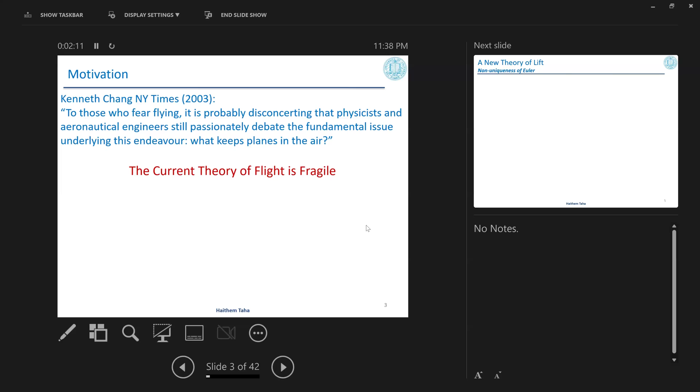So here is the problem that we're trying to solve. Here is a two-dimensional airfoil, and we want to compute the lift force. This is the simplest problem in aerodynamics. It can't be simpler than this. It's not a wing, it's not an airplane, it's just a two-dimensional airfoil. And we engineers or applied mathematicians or physicists, we always like to go back to fundamentals, governing equations. If we can't solve Navier-Stokes, let's look at Euler.

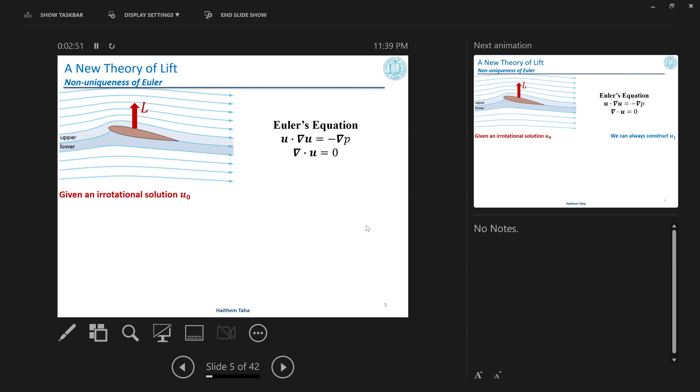Here is Euler, steady. If you give me a legitimate solution of Euler, any solution you like, so it satisfies the PDEs and the boundary condition, a perfectly legitimate solution U0, I can always construct a special flow field U1. It's not a solution of Euler, but, and this is like a small lemma, U0 plus gamma times U1 is a solution of the Euler problem for any value of gamma.

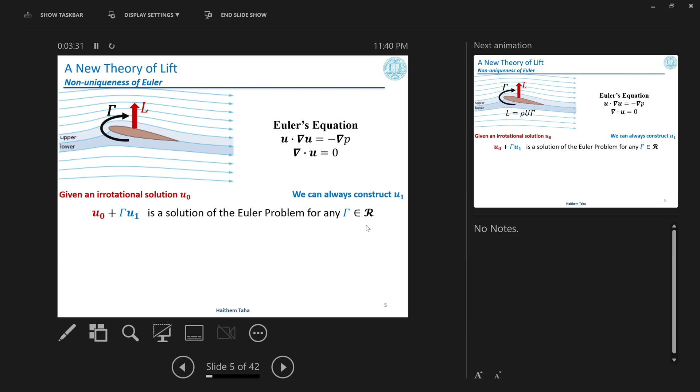So a solution with gamma equals 1 is as legitimate as a solution with gamma equals 1 million. Both satisfy the partial differential equations and boundary conditions. They are perfectly legitimate mathematical solutions. So the question is, what does gamma represent? Maybe it's not important to worry about. Actually, gamma represents the circulation over the airfoil, which solely dictates the lift force. If you give me gamma, I immediately give you back the lift force. Rho is the density and U is the free stream velocity.

So ironically speaking, the Euler equation alone cannot determine one of the most fundamental quantities in flight, which is the lift force, the most important quantity that we care about. The question has always been, what solution does nature select out of these infinitely many possible solutions? It's as if you have x squared equals 4, so x equals plus or minus 2. So let's look at these solutions and pick the most physical one.

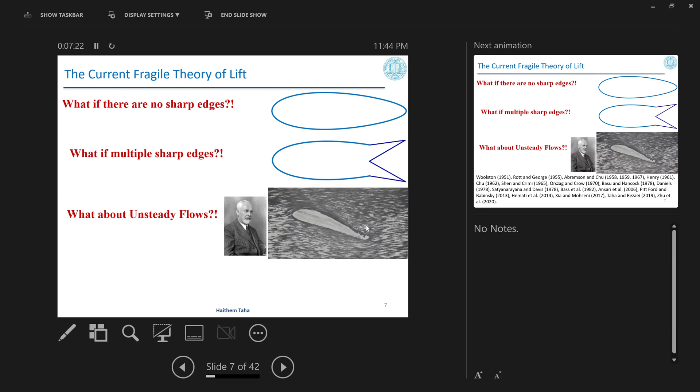So the Kutta condition doesn't seem to be applicable in unsteady flows, and you have tens of papers in the literature criticizing the application of the Kutta condition to unsteady flows. Yet the entire theory of unsteady aerodynamics, from the pioneering work of Wagner, Theodorsen, von Karman, and Sears, all the way to the most recent work in the JFM, they all adopt the Kutta condition in their unsteady models, because simply there are no alternatives. If you don't have the Kutta condition, there is no means to single out one solution out of the family.

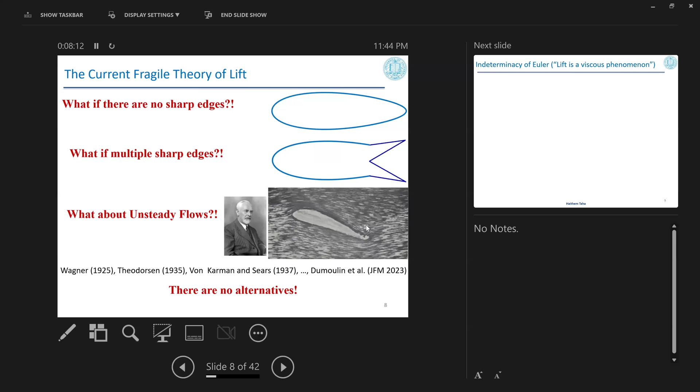So this is why I'm claiming that the current theory that we teach to our undergrads throughout the world is quite fragile. If you change something in the shape of the wing or in the flight condition, the theory collapses, and we don't have a means to compute the lift force, which is very important.

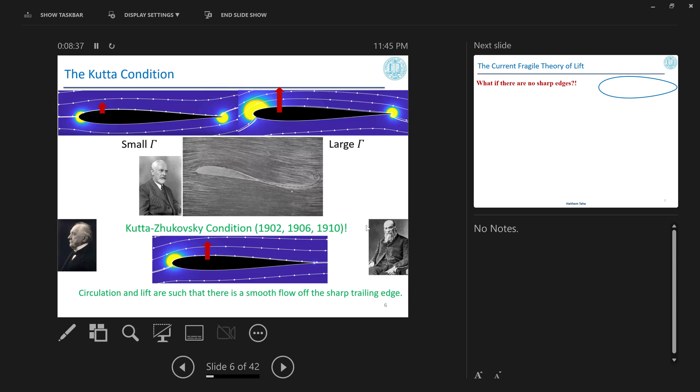What is the Kutta condition again? The Kutta condition is that it removes the singularity. For any other solution, the speed and acceleration go to infinity. This is the only solution where the speed is finite. So if you have a sharp edge, it helps you to remove the singularity. But if you don't have a sharp edge, there is no singularity to begin with. So there is no way to single out the solution.

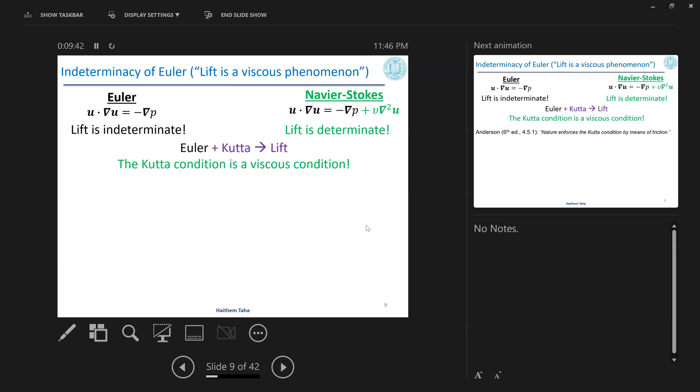And when we feed the Euler equation with a Kutta-like condition, we get lift that is close enough to Navier-Stokes in the nice, attached flow case. So this also seems to suggest that the Kutta condition is a viscous condition, particularly because the Kutta condition was based on observation from reality, and reality is viscous. So this is, I would say, the conventional wisdom in the aeronautical engineering community. Pick your favorite aerodynamics book.

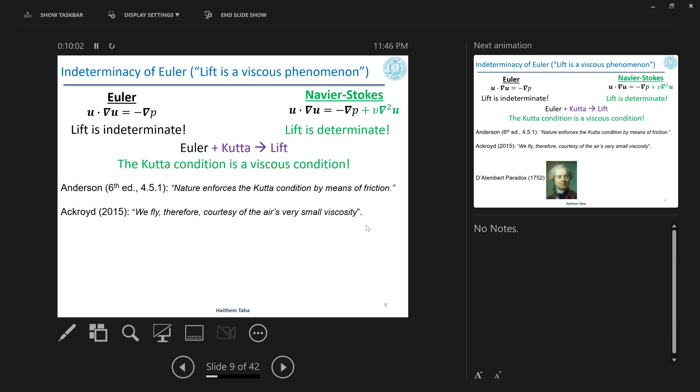Here is Anderson. It says, nature enforces the Kutta condition by means of friction. Here is Professor Ackroyd of Manchester: we fly courtesy of the air's very small viscosity. That's the accepted wisdom in the community. Viscosity gives us lift. And the issue is deeply rooted in D'Alembert's paradox.

Because D'Alembert, around that time, solved the ideal flow equations over some shape like this. And he obtained a completely symmetric solution, fore, aft, up, and down, resulting in a zero net force. And the issue is that D'Alembert's solution, if you try to replicate it over any shape, not necessarily this one, any shape, will give you a zero force.

So deep down in the background of most, not all, most physicists and fluid mechanicians, ideal fluids are forceless. They cannot lift an airplane. They cannot produce forces. So just before leaving this slide, there is one fact that I'd like to stress: around that time, we really did not know that the Euler equation, steady two-dimensional or unsteady two-dimensional, has infinitely many solutions. And D'Alembert's zero force solution is only one solution in the family. So we're not sure whether nature selects D'Alembert's solution all the time or not.

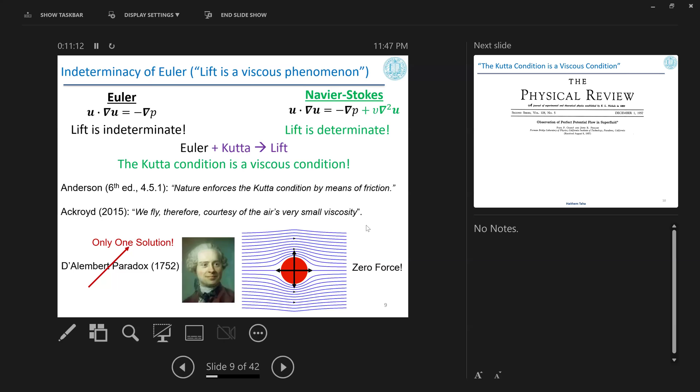The situation was exacerbated even more with this very interesting work at Caltech in the 50s. So they wanted to settle this debate. So they said, okay, if I am claiming that this bag is heavy because there is a box inside that is too heavy, it's making the entire bag heavy. How to test this hypothesis? Remove the box and see if the bag is still heavy or not, right? This is what they did. They said, okay, let's remove viscosity and see what happens.

So let's cool down helium-2 down to a crazy temperature like 2 Kelvin. It becomes a superfluid. Now it has zero friction. So they made a superfluid wind tunnel. This work was done under the guidance of great names like Feynman, Liepmann, and Roshko. So they made a superfluid wind tunnel, a very small wind tunnel, where a superfluid is flowing over some shapes. And they measured the lift. Do we get lift or not? They actually got zero lift.

So this was their conclusion: the classical viscous boundary condition at the trailing edge, i.e. the Kutta condition, doesn't apply. So they are calling the Kutta condition a viscous condition, as usual. And this made sense. Lift, we get it from the Kutta condition. They believe that the Kutta condition is viscous. Here we have an experiment with no viscosity. We found that the Kutta condition doesn't apply and we didn't get lift. It made sense and it was like, that's it. That's the experimental stamp. Lift is due to viscosity.

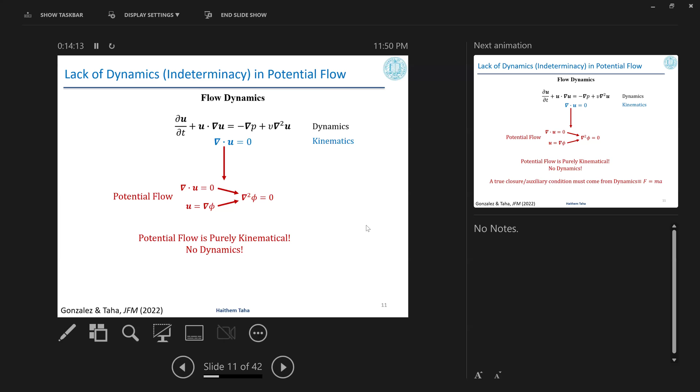So it seems that potential flow is purely kinematic and there is no dynamical consideration, which means that if we want to generalize the Kutta condition, and we're not criticizing the Kutta condition, it's so invaluable in aerodynamics, but its region of applicability is so confined. We want to generalize it. We want to have a general theory. If we want to generalize the Kutta condition, the generalization must come from dynamical consideration, force equals mass times acceleration, because this is what is missing, right?

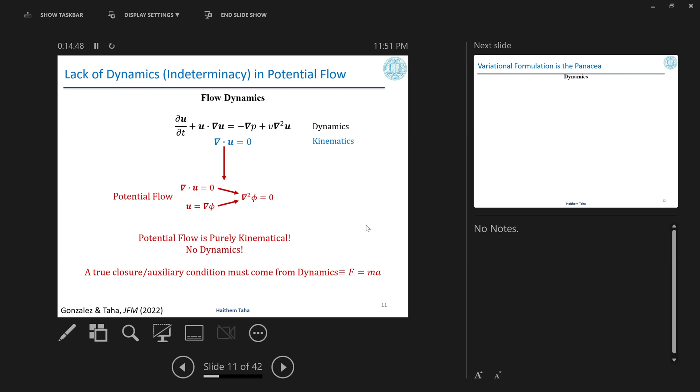But that's very challenging. How to project the dynamics, Navier-Stokes or Euler, doesn't matter, on a one-dimensional manifold to focus on gamma alone. I don't want to go and solve the entire flow field down to the Kolmogorov length scale. I'm happy with my model. All I want is one single parameter, gamma. Can you give me gamma? That's it. So that's a very challenging problem: how to project the entire dynamics on a one-dimensional manifold.

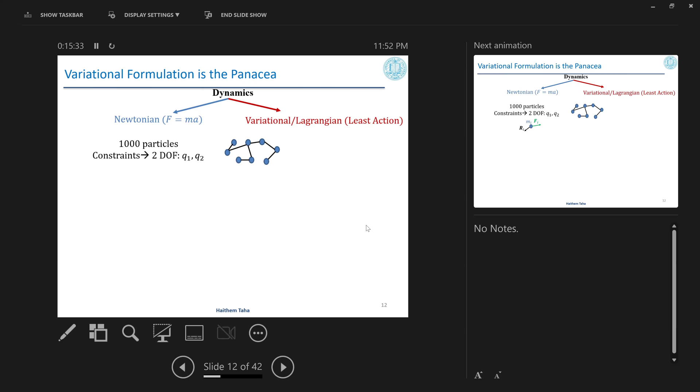How can we solve this using Newtonian mechanics? Well, the very first step in Newtonian mechanics is to draw a free body diagram. Right? So I have to isolate each particle and write down the equation of motion for each particle. So these are 3,000 equations of motion. And I need to be patient enough to mathematically manipulate them to arrive at two relevant equations at the end, because at the end of the day, I have only 2 degrees of freedom. That's the only way to do it using Newtonian mechanics. There is no other way. I have to write down 3,000 equations of motion and solve them, even though I have 2 degrees of freedom.

I mean, this is actually for a continuum of infinite fluid particles, you have a partial differential equation. Right? So you have Euler or Navier-Stokes. On the other hand, when we look at the Lagrangian variation, there are many ways to describe it. I'll describe it in my own way, which is sometimes controversial, but I'll do it anyway. So the main premise is that nature minimizes a certain fundamental quantity.

So any motion, you have a planet that is orbiting the sun, or a tree leaf falling to the ground, or a heart that is beating, or a viola string that is vibrating. They all move such that a certain fundamental quantity is minimized. So if you manage to write down your fundamental quantity in terms of your degrees of freedom, then the rest is easy. It's high school calculus. Differentiate and equate to 0. You get 2 equations directly in the 2 unknowns without the need to solve 3,000 equations.

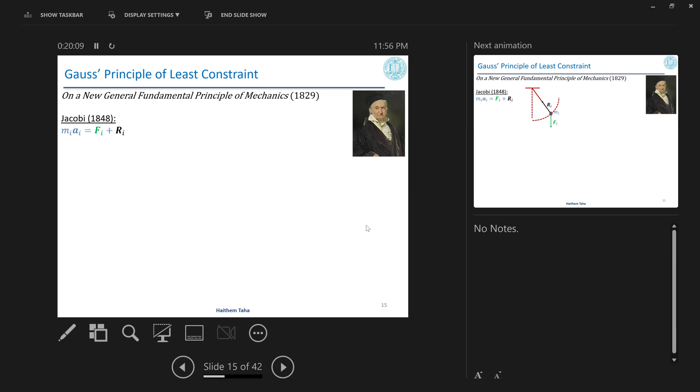In the absence of constraints, so there is no R, these two quantities are exactly the same. You apply a force, you get a motion in the same direction. In the presence of constraints, however, if you have non-zero R, the actual motion will deviate from the applied motion. Why? Because of the constraint. Then it means that it will deviate from the applied motion only by the amount that satisfies the constraint and not anymore. So this is why this quantity must be minimum.

And in fact, you can rewrite this quantity from the equation of motion as R over M. And it's as if we're minimizing the summation of all constraint forces. So this is why, hence the name least constraint. Okay. And when you write it as R like this, it looks familiar. It looks like a residual. R is really a residual between the applied motion and the actual motion. So it's as if we're minimizing the residual squared. So it rings the bell of least squares.

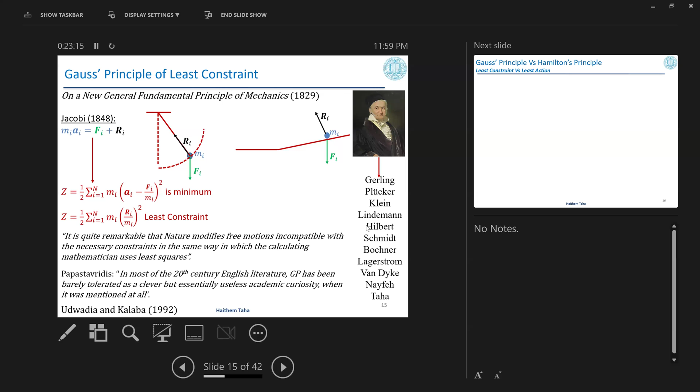But before leaving the slide, I'm going to give a fun fact. I was very happy when I learned that there are only 10 names between Gauss and myself, thanks to Haithem. And there are some nice names here like Klein and Hilbert. So anyway,

let's go back to your point. Let's make a comparison because this is very well known. Hamilton's principle of least action versus Gauss' principle of least constraint. And this actually makes selling things along this line of research difficult, because whenever I use a variational principle, people immediately jump to here.

First of all, if you look at the dates, they were developed around the same time. Yet this is very famous. It's discussed in every single textbook in analytical mechanics and classical physics. This one is rarely encountered, which is quite interesting. The applied forces in Hamilton's principle of least action must be, I don't want to get into details, let's say coming from a potential energy, conservative kind. Here, no, they can be arbitrary, which is a big plus. That's really a big plus.

Hamilton's principle is stationary. It's not necessarily minimum. All what we know is that the first derivative is zero, the first variation. Gauss' principle is a true minimum. That's also another big plus.

In Hamilton's principle, the quantity that we minimize, or whatever, extremize, is an integral over time, the integral of the Lagrangian, right? Integral of kinetic energy or whatever over time, the action. So your variable that you're differentiating with respect to is the whole trajectory. So this needs a special calculus, the calculus of variations. And when you use calculus of variations, you get Euler-Lagrange.

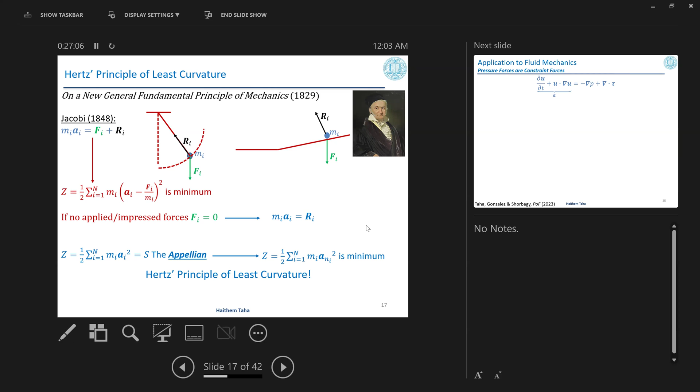Okay. So a particle moves according to least curvature. A collection of particles moves such that the total curvature in the system is minimized. And that's a special case of Gauss. I think that's enough. Let's go and apply it to fluid mechanics. Incompressible flow, of course, here. So this is Navier-Stokes, mass times acceleration equals forces, and I'm taking unit density, unit mass, because it's incompressible.

In order to apply Gauss or any analytical mechanics, any variational principle, I need to classify forces into applied and constraint forces. Viscous forces are applied forces. They are not associated with a given constraint such that if the constraint is removed, they will no longer be there. This is not the case. They are part of the fluid identity, so they are applied forces.

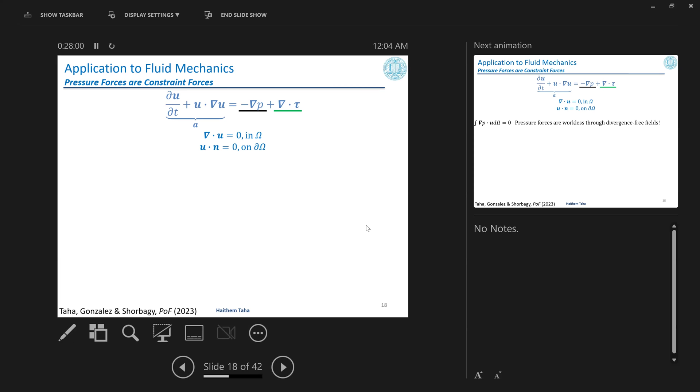Interestingly, as many people know, particularly the math community, this is very well known, perhaps less well known in the classical fluids community: pressure force for incompressible fluids is a constraint force. Actually, its sole role is to enforce the continuity constraint. And it's easy to show in a couple of lines that if you have a velocity field that satisfies continuity and the no-penetration boundary condition, then the pressure force doesn't do any work on it. It's workless, which comes from the Helmholtz-Hodge decomposition.

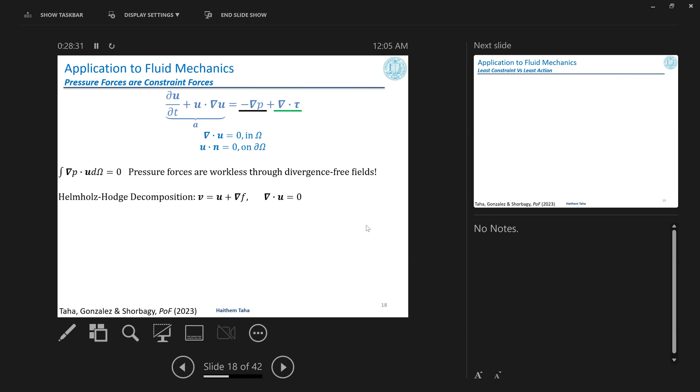If you have a velocity field, you can decompose it into two components, one that is divergence free, and the other one is the gradient of a scalar function. And these two components are orthogonal. So the velocity field U is not only orthogonal to Nabla pressure, it's orthogonal to Nabla of any scalar function. Let's sketch it. So this is R3, our world, and here is a blob of fluid.

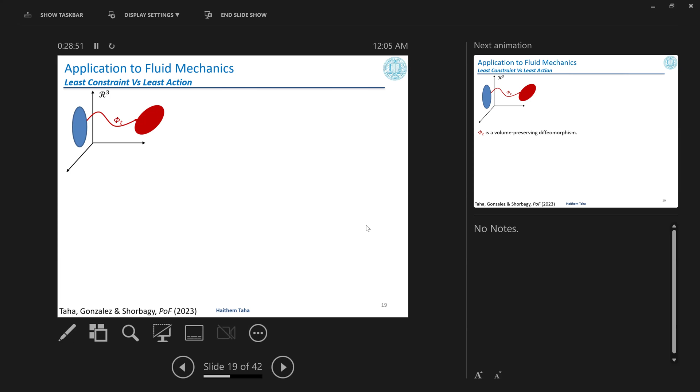It goes after some time into another configuration, and phi t is the flow map that maps the initial configuration to the final configuration at some time. Phi is a smooth map with a smooth inverse. The mathematicians have a fancy name for it, a diffeomorphism, right? But for an incompressible flow, it's volume preserving, so it's a volume preserving diffeomorphism. Okay. Now let's go to this fictitious space, an infinite dimensional space, a very large space, the space of all these diffeomorphisms.

So any point in that space is one of these maps. Okay. So any point here is a snapshot of a flow field. Why? Because this map maps all the initial conditions to this snapshot. Okay. Not all points here are relevant for an incompressible fluid, because only those lying on the volume-preserving surface or manifold are relevant. A curve here is just a flow field, right? An evolution of a flow field.

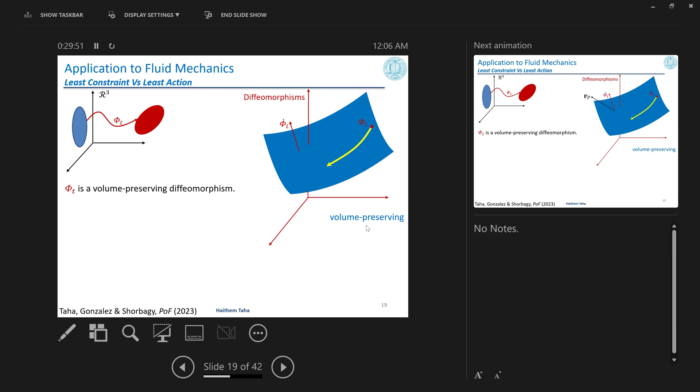And the tangent vector to that surface is just a velocity field that satisfies continuity. It's a divergence-free velocity field. By Helmholtz-Hodge decomposition, the pressure force is normal to that surface, right? And now look at this picture and use basic knowledge in mechanics. Let's consider ideal fluid. For ideal fluid, you don't have viscosity. The only acting force is pressure force, right?

But the force is normal to the surface. So on the surface, the fluid is free. No force is on the surface. And like any free mechanical system, the least action says it has to move along straight lines, along geodesics, right? This is exactly Arnold's seminal result, but in a sketchy way, that the motion of ideal fluids are geodesics in the space of volume-preserving diffeomorphisms.

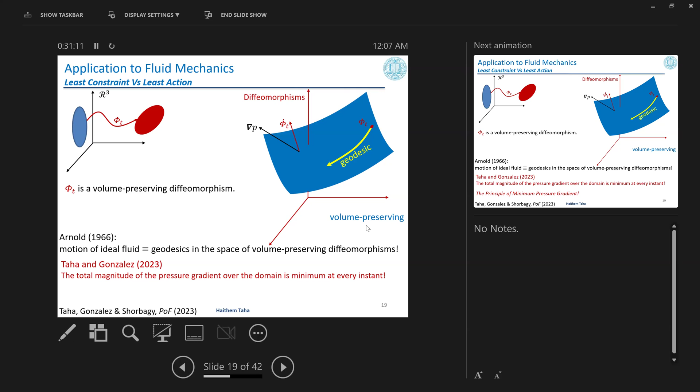Okay, so that's natural. Now let's take one step ahead. Let's now consider real fluids with viscosity. So I have other forces coming from viscosity. And instead of applying least action, let's apply Gauss's least constraint. What does Gauss say? Gauss says that this force is a constraint force, so the summation of all constraint forces is minimum. That's precisely what we're saying here: that the total magnitude of the pressure gradient over the domain must be minimum at every instant in time. And this is what we call the principle of minimum pressure gradient.

Okay. So I walked you through how we came up to this conclusion, doing nothing but applying Gauss's principle verbatim. But here is a theorem which is not fancy at all. It's applying standard tools in calculus of variations. It says if you give me a solution that minimizes this function, a minus f over m, which is nothing but the pressure gradient, subject to continuity for all time and space, and the no-penetration boundary condition for all time, this can be anything, it doesn't have to be homogeneous, then this solution must satisfy the Navier-Stokes equation. And again, this is really standard tools in calculus of variations.

It's nothing fancy. So it means that the Navier-Stokes equation is the necessary condition for minimizing the pressure gradient, which turns a fluid mechanics problem into a minimization problem. Why? Because if you give me a solution that minimizes this thing, it is guaranteed to naturally satisfy Navier-Stokes. You don't need to worry about Navier-Stokes. In fact, this minimization is a bit more general than Navier-Stokes in the following sense.

If you have extra forces like electromagnetic forces, for example, I must come here in Navier-Stokes and add my force. I must modify the equation. Whereas the PMPG applies verbatim with the exact same statement: the total magnitude of the pressure gradient must be minimum at every instant in time. So we use this to solve classical fluid problems without going to Navier-Stokes, just minimize the pressure gradient.

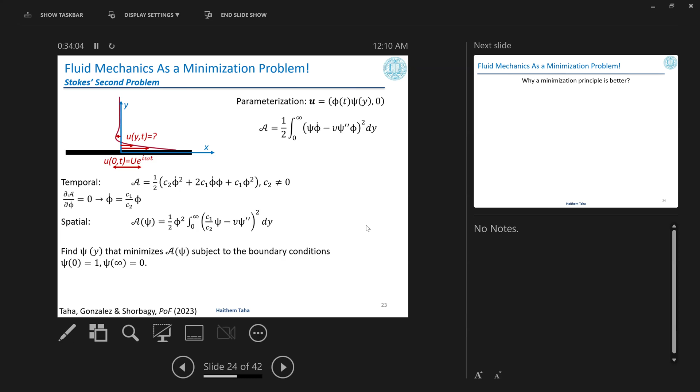So this raises the question: why is a minimization principle better? Okay. There are several cases we can discuss at the end, but this is my own motivation as someone interested in reduced order modeling. As an engineer, I really don't care about all the flow details down to the Kolmogorov length scale.

I really don't care about this. I care about global quantities like lift, drag, separation point, these kind of quantities. So I'm very happy with a reduced order model that doesn't give me all the details, but gives me some of these quantities with good approximation.

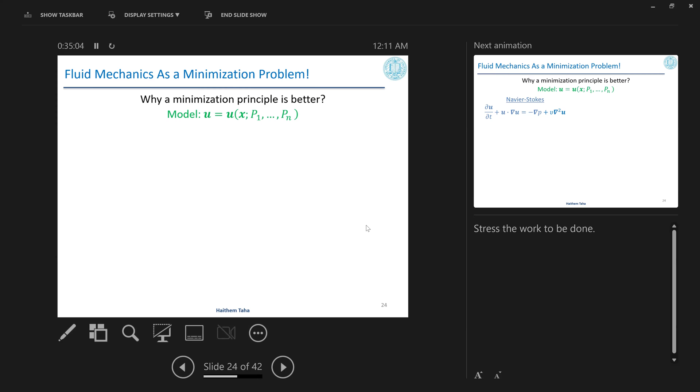So if you start with an approximation for your velocity field with some unknown parameters, so you parameterize your velocity field with parameters quite freely, do whatever you like. So I'm happy with this parameterization as a user. All I need is just the values of these parameters or their time variation, their dynamics. Navier-Stokes as a partial differential equation, we can't focus on the dynamics of few parameters. It's like take it all or leave it all.

It gives you the flow details down to the Kolmogorov length scale if you solve Navier-Stokes, so you're doing DNS. If you want to do averaging, then you're solving another equation. You're solving RANS. It's not Navier-Stokes. It's a different equation, right? So Navier-Stokes unfortunately gives you all the details, which is sometimes good, right? But unfortunately, it doesn't do it for free. It's too demanding to the extent that there is no supercomputer on the entire planet that can solve Navier-Stokes on an actual airplane. It's too demanding.

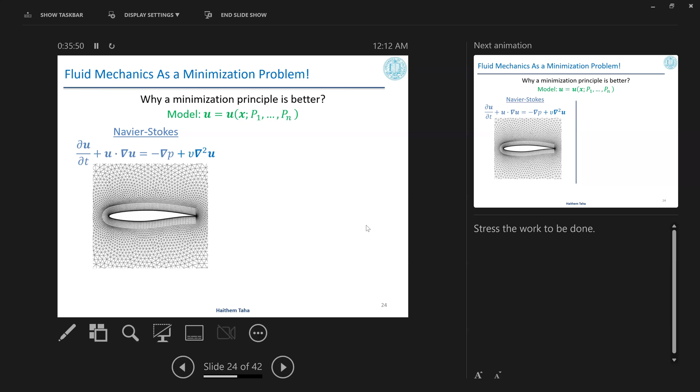Is this a Delaunay mesh or something? I don't know. Someone gave it to me. I'm not an expert in computation. No, I think we used this mesh in one of our RANS simulations.

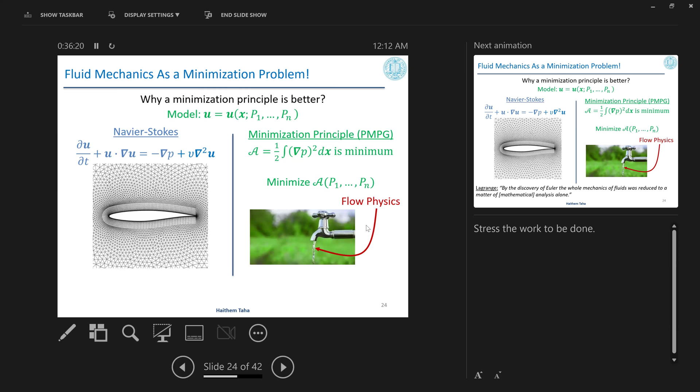And on the other hand, if you have a minimization principle, that's straightforward. You plug this form into your cost function. The result is a cost function that is a function of the parameters. The rest is easy. Just minimize with respect to your parameters. If this parameterization is poor, make it richer, add more parameters. Okay, so it will allow you to control the amount of flow physics that you want to see.

Okay, so actually, it reminds me of what Lagrange said. When Euler developed his equations, the famous Euler equations, Lagrange made this comment. He said, by the discovery of Euler, the whole mechanics of fluids was reduced to a matter of mathematical analysis alone. It's like mechanics-wise, it's done because we have the equation of motion. That's done. But all that remains is to solve it mathematically.

Okay. Now the situation is reversed. Why? Because the mathematical solution may be simple, particularly if these are few. It's just minimized, and you can get it easily with the computational power that we have nowadays. But the real challenge is here, actually, how to propose a form that captures the physics that you want to see. Okay. Anyway, let's go back to our problem that has been waiting for a long time.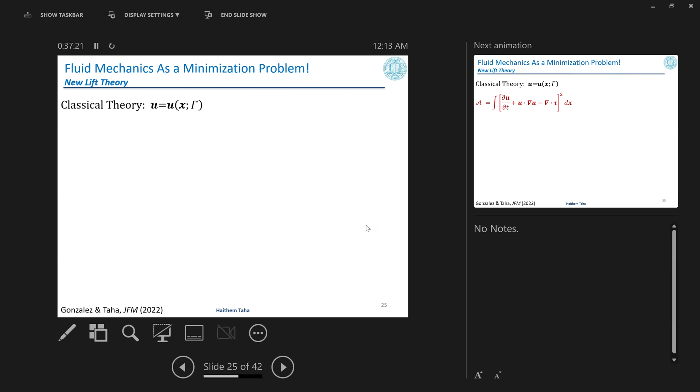This is the classical theory of lift. I know already the velocity field everywhere, and the theory is actually giving me a nice parameterization. There is only one unknown parameter, gamma, right? So I'm going to call my cost function that nature minimizes at every instant in time. And because this is steady, I don't have time variation. And I have a means to account for viscosity, but for a moment, I'm going to cross it out myself. I'm going to assume that my fluid is ideal, no viscosity.

So now my cost is simply curvature, because there are no applied forces. So this is curvature, and I integrate over space. I plug this here, I integrate over space. The result is a fourth order polynomial in gamma. So really high school calculus, nothing fancy. And let's try it for the problem where we already know the solution, a sharp edge airfoil.

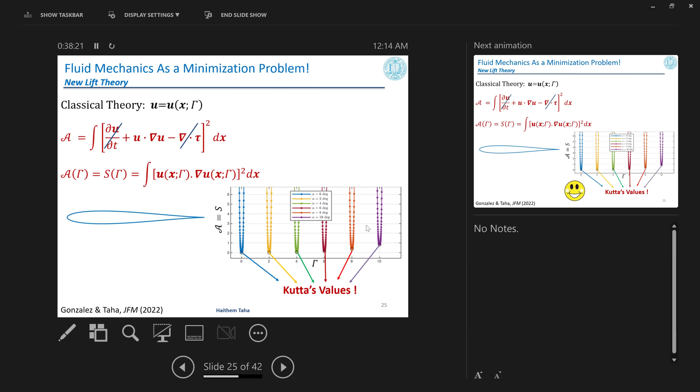Here is the cost function versus gamma at different angles of attack. At each angle of attack, there is a unique gamma that minimizes curvature. And all these minimizers coincide with Kutta's values for this case of a sharp edge foil. So we happily recover the Kutta condition as a special case of this non-viscous theory. Okay. Again, those curves are different alphas. Okay, so alpha is the angle of attack. Yes.

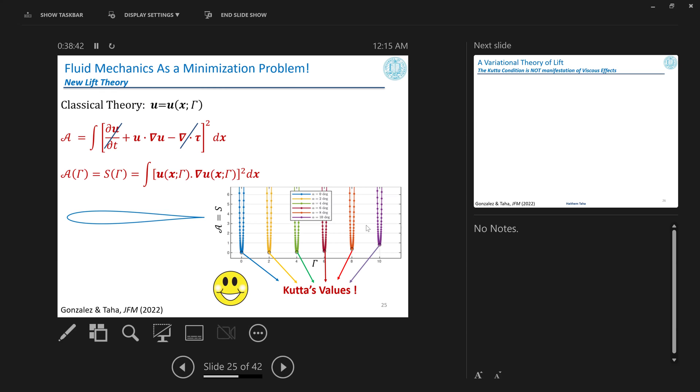So, but this theory now doesn't care whether I have a sharp edge or not. So for the first time, I can consider a family of shapes, smooth shapes, parameterized by this parameter d. D equals 0 is the blue sharp edge airfoil. D equals 1 is the green circular cylinder. In between, I have a family of shapes with smooth trailing edge to which the Kutta condition is not even applicable. So here are the contours of our cost function, curvature, or pressure gradient, in the gamma-D space.

And the yellow curve is the minimizing gamma star, normalized by gamma Kutta. For a particular value of D, give me any value of D, this means a specific shape. For this specific shape, we know that we have infinitely many gammas, but nature chooses only one, the one that minimizes curvature in the language of Hertz. And for D equal 1, this is a green circular cylinder. The minimizing gamma is 0, recovering the well-known fact that a circular cylinder is non-lifting.

But interestingly, this was not only for the circular cylinder. If you tried any symmetric shape, flat plate or an ellipse, purely symmetric, fore, aft, up and down, you will get a minimizing gamma that is 0, which confirms the experimental results of the Caltech folks. They did it also on symmetric shapes. So a symmetric shape in an ideal fluid is non-lifting.

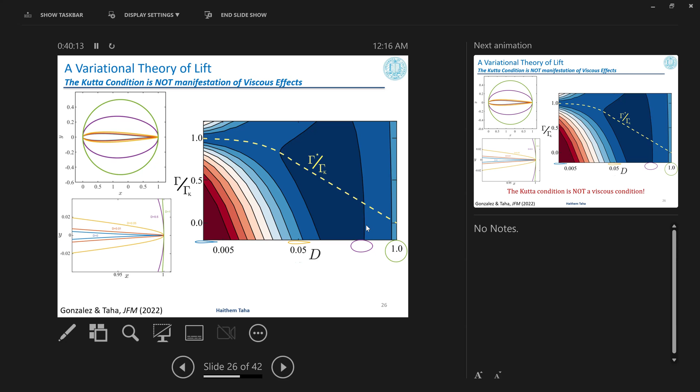But now if you go all the way here to a sharp edge airfoil, we recover the Kutta condition in the limit, which means that the Kutta condition cannot be a viscous condition because now it's a special case of an inviscid theory, so it cannot be viscous on its own. So yeah, that's it. Because as you know, this is taught in all undergrad school, the Kutta condition. So it created some debate in the community.

And then Aerospace America, the magazine, they interviewed Dr. Paul Bevilacqua and myself. Paul is chief engineer of F-35, chief engineer in Lockheed Martin, who built the F-35.

Did you try in the non-ideal case to take non-symmetric shapes with the minimizing gradient of the pressure? Not non-symmetric shape. Yeah. Yes. Right. What I did, I can show it to you. Yeah, I'll show it to you.

So they had a nice article with a fancy title: You think you know lift? Better read this. If you're interested in this problem, you can read more. Also, this is probably my last slide. I'd like to say that this topic has a very rich history. I always move this book, and it got worn, but now I have it in nice shape. This is a 550 pages book written by a sociologist, David Bloor, about the history of the classical theory of lift.

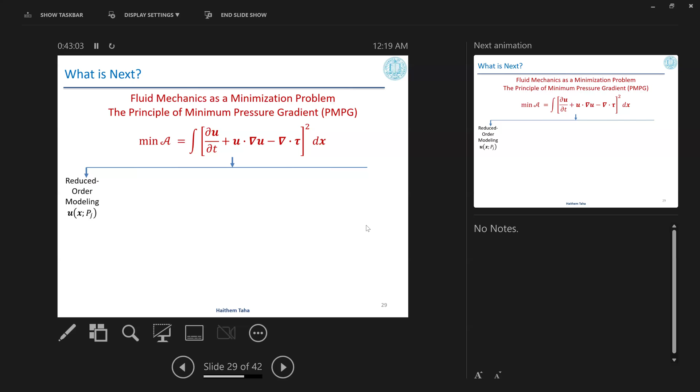But we did something that might be satisfying, and actually goes back to your question, which is ahead in the slide. So we didn't solve Navier-Stokes, but we solved RANS. So we said, okay, here is an airfoil shape at small angle of attack, 2 degrees and 4 degrees. The flow is attached. The flow is nice. We expect RANS will perform well. It actually gives nice results in comparison to reality. So we compare against RANS.

So let's see what this is. This is our cost function normalized versus gamma at different angles of attack. Black are our minimizing values. And the cyan are the RANS computations, which are not Navier-Stokes, but should be close enough, hopefully.

The pink ones are: if you put the hat of a practical engineer and say, look, this doesn't seem to be too far away from sharp. I'll consider it to be sharp and apply the Kutta condition anyway. Because if I don't have this minimizing theory, the only way is to apply the Kutta condition. If you insist on applying the Kutta condition, this is the value of gamma you're going to get.

So as you can see, first of all, at all alphas, we are closer to RANS than Kutta. And even at alpha equal 2 degrees, a very small angle of attack, and this is not too far away from a sharp edge, Kutta is quite off.

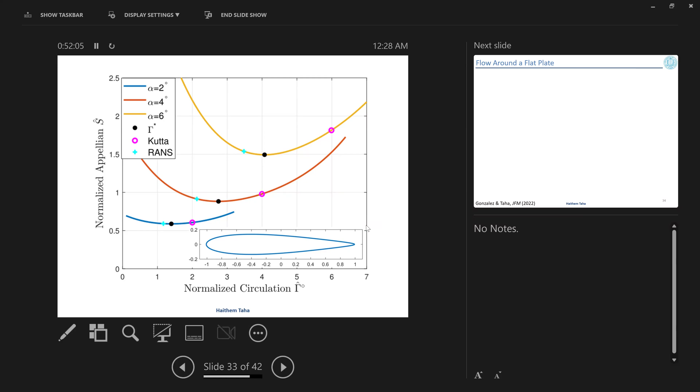Do you think this can be used to optimize the shape of the wing, minimize the drag and maximize the lift? That's an excellent question, and in fact, as an engineer, that was really my motivation and my shock at the same time. When I grew up as an aeronautical engineer, I thought that we computed lift and drag for all these shapes, and then we picked this airfoil because it's the best. But then I realized that we cannot even compute lift for all these shapes. This is the only shape where we can compute lift, and it just happens that this shape is good enough.

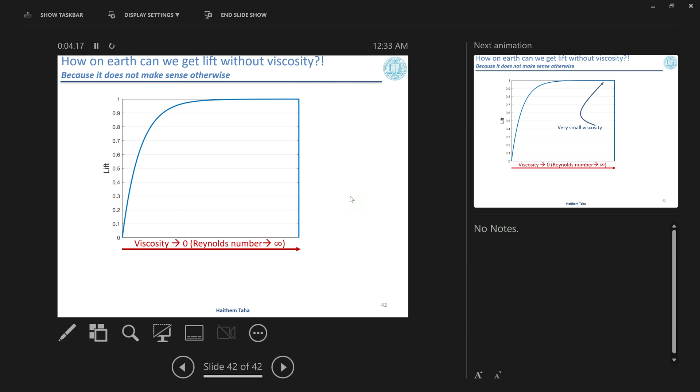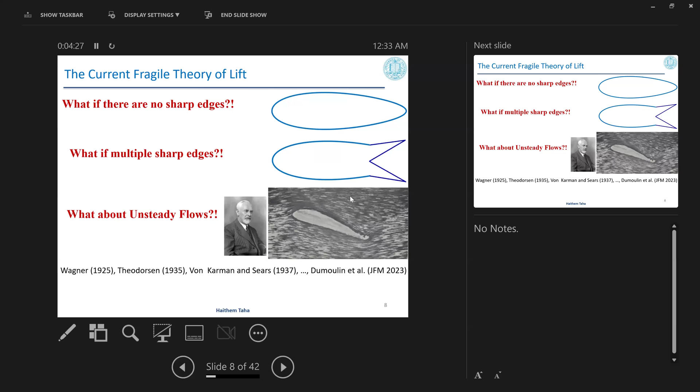If you would solve the Navier-Stokes equations exactly, then in the limit of viscosity going to zero, there will be some thin region which is responsible for that. That's an excellent point, and I thank you. This is a really excellent observation. I skipped one point here, and I'm glad that you came back to it. Where is that? In the comparison between the two principles. Yes, maybe here.

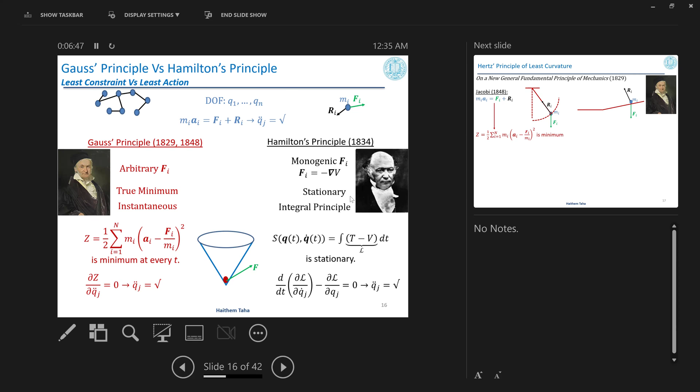I forgot to ask. I will send you. Okay, let me do it a simple way. Oh, thank you so much.